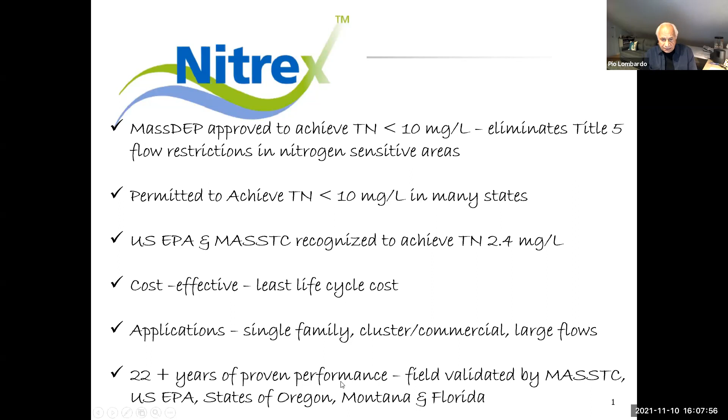As I mentioned, we have over 22 years of proven performance that has been field validated at MASSTC, US EPA, and the states of Oregon, Montana, and Florida, where a number of actual installations were implemented by those state agencies and independently evaluated. Brian Baumgartner of MASSTC made a presentation not that long ago at an EPA-sponsored event.

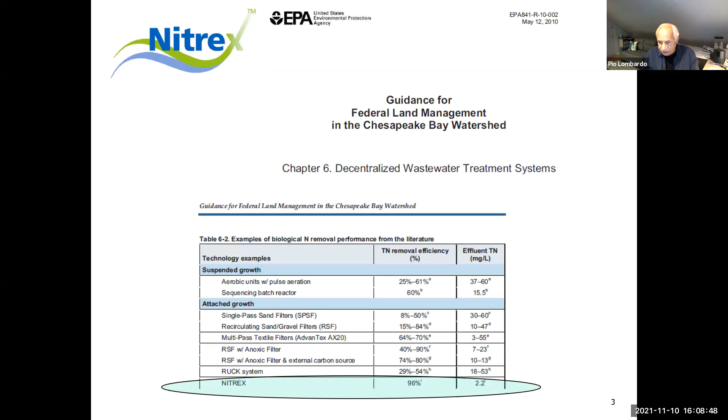So I just clipped what was summarized from his presentation that identified his list of the 5 best available IA technologies, and Nitrex is right there along with a few others in terms of effluent quality, as Brian indicated. EPA evaluated this back in 2010 and issued a report providing guidance for federal lands in the Chesapeake Bay watershed. As you can see, it provided documentation that effluent TN for the Nitrex system was 2.2.

It's a passive technology. There's no aeration required. The only requirement, and it's really site specific, is there's a need for some pumps - we're talking about 1/3 horsepower pumps.

The treatment system cannot be shut off by property owners. I know that's a concern with certain technologies. The technology can be completely gravity-fed when sites have sufficient slope. In fact, the original applications back in 2001 out in Oregon were indeed just pure gravity. They went from basically a single pass sand filter, then through the Nitrex filter, to discharge. There were no pumps needed there - one just needs the topo for that.

There's no sludge that's produced. The electricity is mainly used, or only used, for periodic pump use. The pump operates - I forget the exact numbers - but it's less than 25% of the time, and it's very low wattage.

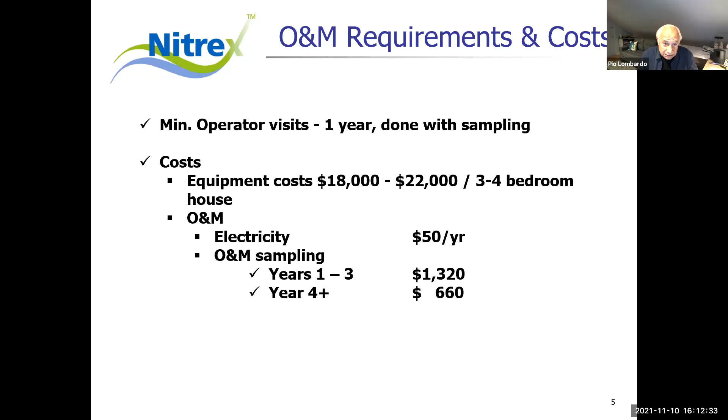Naturally, when the operator is there to collect the samples, they do the minor maintenance needed on the system. The major maintenance item has to do with the pumps, really just the floats, and the spray nozzles periodically need to be cleaned. That's it. Now, in terms of nitrogen removal, I'll say parenthetically, since I understand this is of interest in certain watersheds, phosphorus removal features can be added to the system if desired.

I've also been focusing on single family systems because that's my understanding of the focus in Wellfleet. However, the Nitrex has been used for larger scale systems throughout the Commonwealth and many other applications.

We use a SCADA system where the system is managed by a PLC, programmable logic controller, which has an internet connection that communicates to the engineer and operator for the system. Daily reports are electronically issued on system wastewater flows and process unit status. These are predominantly mechanical systems.

We know there's an effort underway for this device, the nitrogen monitoring device, and should that get proven to be usable, it would make a huge positive impact on operational costs.

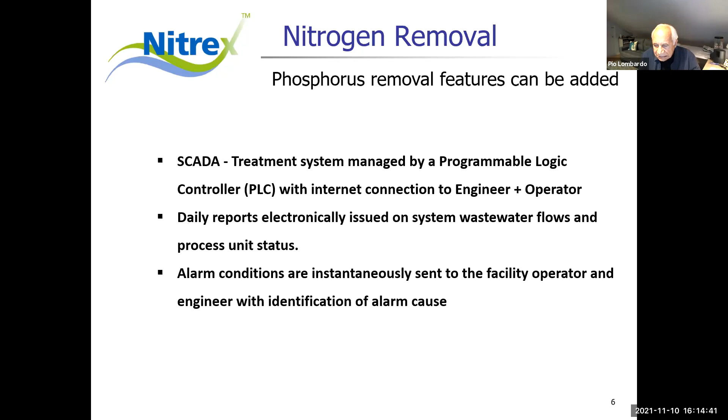This is an example of the PLC at a cluster system, at Granby, Massachusetts wastewater treatment plant. This is a groundwater discharge location. Code flow is 17,000 gallons per day. You'll see all the various pumps in the system are monitored in terms of their runtime and flows, so we can watch what's going on.

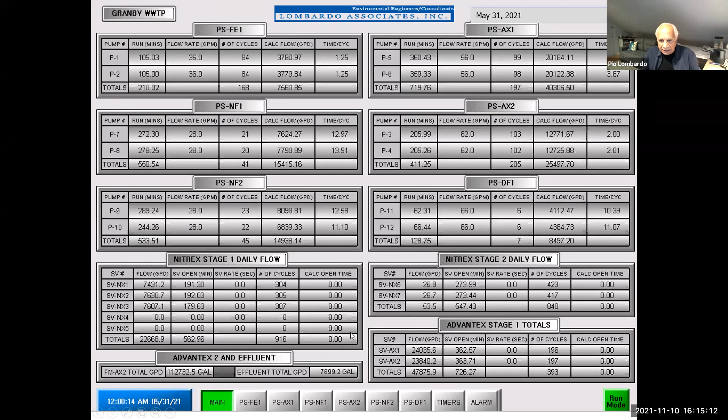At another facility, we also have real-time monitoring of nitrate and ammonia levels throughout the system.

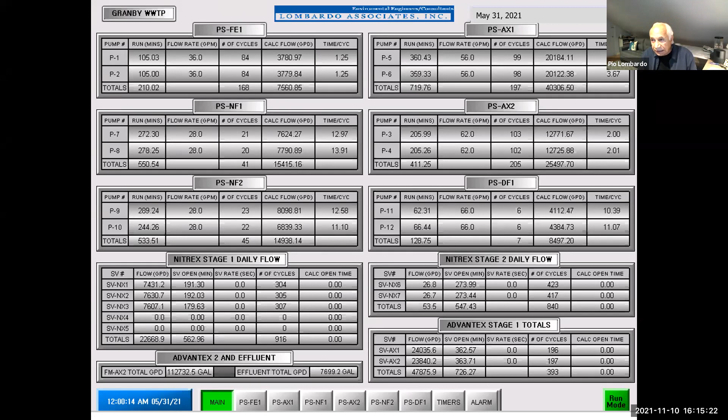We also had installations down in Rhode Island. We made a number of donations to the URI people and installed the system, as you can see, in the year 2003.

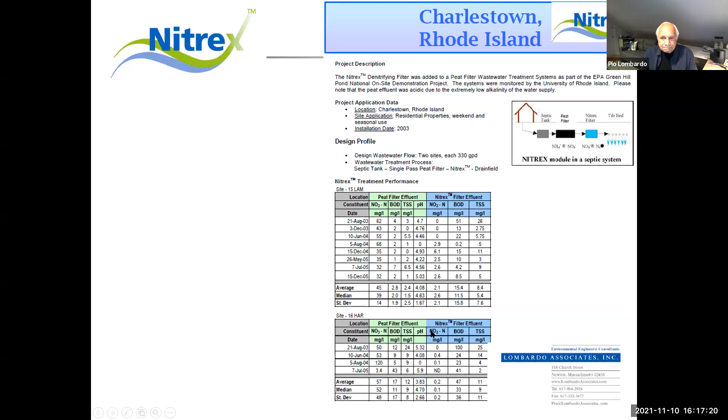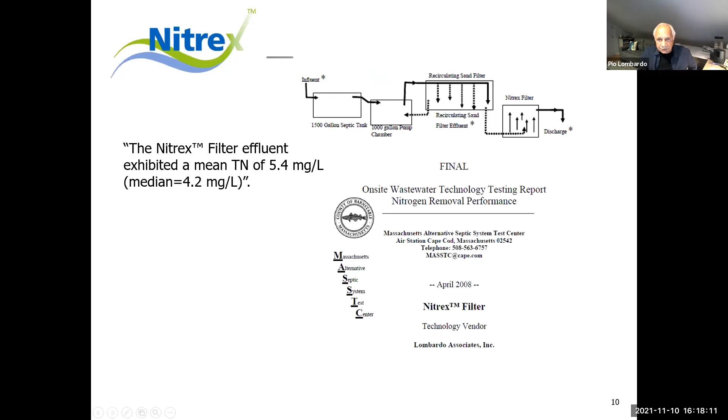In terms of larger scale systems, we've done a number of cluster developments in Massachusetts and other locations. In Mashpee, it's underneath the parking area, and that's one of the nice features of our system - in certain situations, we're not consuming land, so the land can be used for other purposes. We also have a similar situation in Eastham, where it's about an 8,000 gallons a day system.

And then in Malibu, California, it's underneath the shopping center parking lot. You can see the manhole covers there. That one was a design flow of 45,000 gallons a day.

And then recently, we've completed construction, and it's been operational now, of a system in Southampton, New York, where 11,000 gallons a day serves 37 houses. And this is the treatment plant. Again, everything's below grade, and that's just the operations building. The county there has strict requirements on the operations building, though not much is really needed.

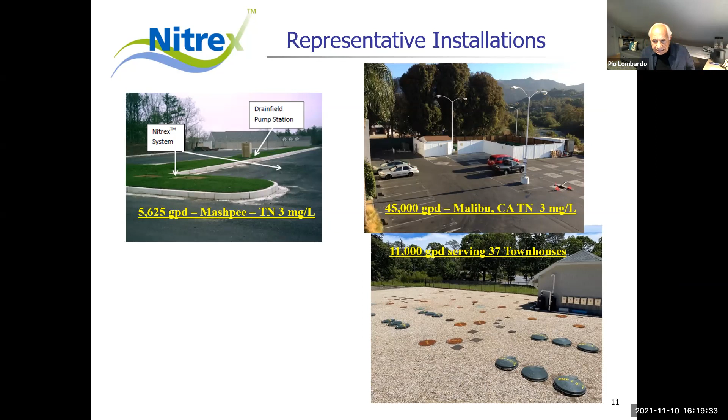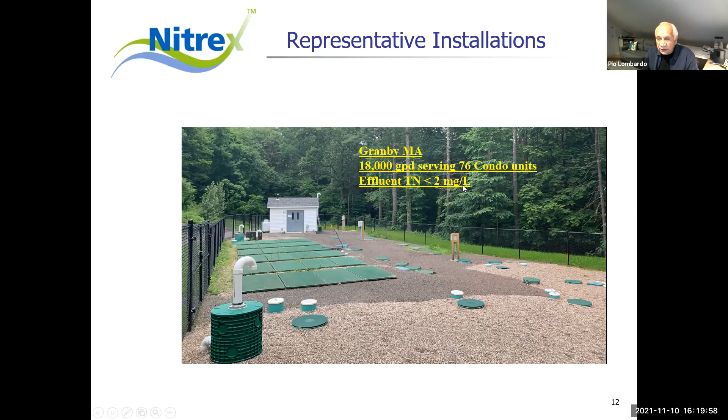And this is an illustration of our facility in Granby, which is, I guess, 18,000 gallons a day. It's serving a condominium. The effluent at that location has consistently been under 2 milligrams per liter, with sampling and lab analysis done every month.

So with that, I know we wanted to stay on a fast track. That concludes our presentation. Naturally, I'm happy to respond to any questions.

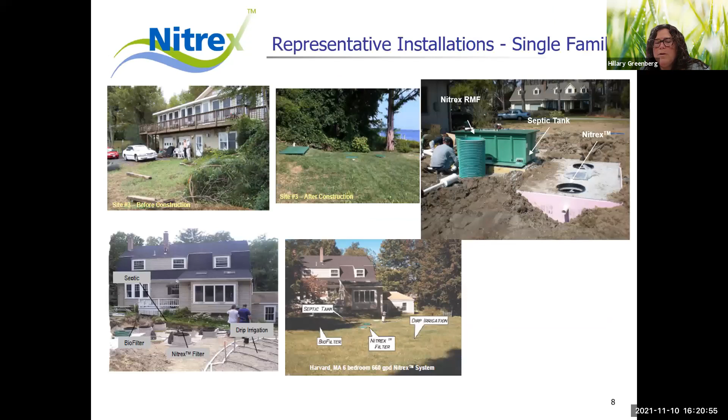Seasonality - can you tell us how your system functions? We have a lot of seasonal homes here in town. What does that do to the sampling protocol? What do the numbers look like on seasonal occupancy?

Yeah, good question. We frankly addressed that at MASSTC back in 2001, where we operated the system - this was all done under George's and MASSTC's control - but the system was basically shut off during the week and operated on weekends only for, I forget, a number of months. There's no change in treatment performance.

So the reason, and the beauty of the technique we use, is that it's a fixed film technology versus an activated sludge technology, and fixed film technology is much more resilient towards varying flows and strength. That's the reason why we have always relied upon fixed film technology. So again, it's not an issue, and we have documentation and data from MASSTC that shows that it's not an issue.

Great. You have a guarantee for your system that if the nitrogen is not coming in below 10 milligrams per liter, you will remedy the situation. What does that look like for a homeowner?

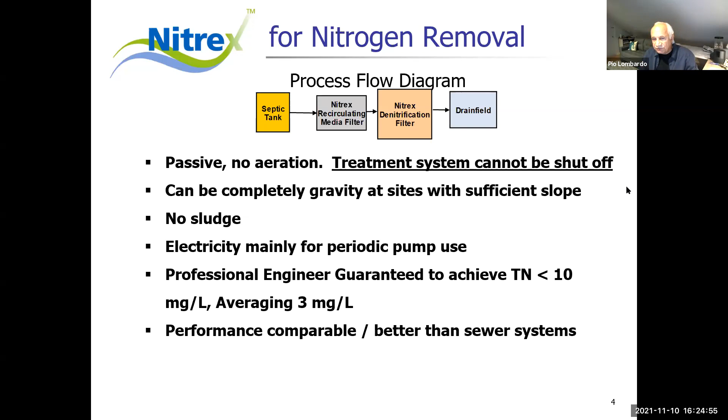Yeah, the way oxygen is provided to the system to achieve nitrification, that's obviously an excellent point, is frankly just by recirculation. The analogy I'd make is it's basically a recirculating trickling filter. The aeration just occurs, like a cooling tower, if you will. It comes from pumping the water on top and letting it spray down on the media. When you do that, air gets incorporated into the water, so that's how oxygen is injected. It's a passive technique versus bubbling air into the water. So the oxygen comes from that recirculating media.

Now, depending on the size, some units don't have it, but there is a fan that moves the air around. It's not bubbling air into it, it's a peanut fan.

But even if you're using an RSF type of media filter, the fact that you're pumping to recirculate does not make it an entirely passive system. Oh yeah, no, I agree, it's not entirely passive. It can be if you have the slope on a property, but you're correct, it's not entirely passive -- it has a small pump.

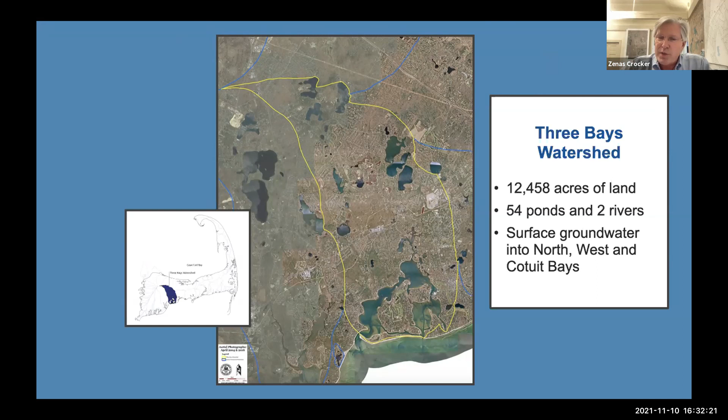Unfortunately, the gold prize goes to Popponesset. The silver goes to Oyster Pond over in Falmouth. This is the third worst. We don't want to win that award, but it's a great area to study the situation, try to understand what we can do, what steps we can take to clean up our water and fix our watersheds.

Here's the town of Barnstable expansion plan, which we applaud. Three phases, 30 years. Originally it was scheduled for 60 years. I stood up and said, that's a bad plan because almost everybody's dead by then. So let's have a plan where maybe some people are still living. It's a plan we need to move ahead with, but it's tremendously expensive.

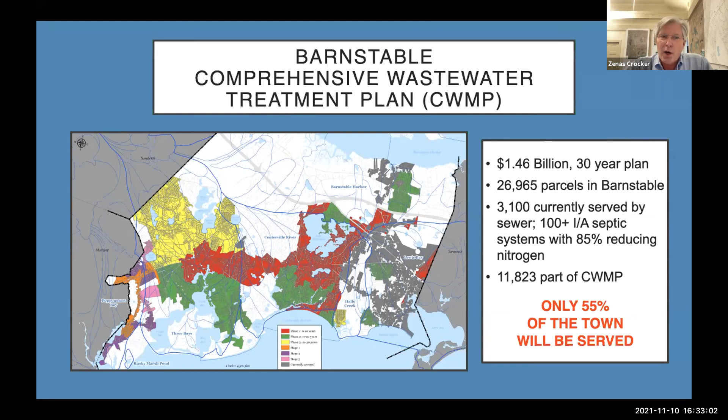One of the things you can see in this illustration is the white spaces do not get any treatment ever. We think that's a missed opportunity, especially when we need to focus not just on the estuaries but also on our lakes, ponds, and drinking water. That's critical. We have a lot of partners here.

They're all really important. A lot of them are on the line with us right now. We have a lot of work to do and we're trying to learn. But what are we doing?

So we identified Shubael Pond, a classic kettle hole pond in the town of Barnstable, as a perfect area to do work. You can see what we've done already with our partners at the US EPA and the US Geological Survey. We put in 34 wells, a number of multi-level sample wells. We have over 70 different locations where we can look at the water quality.

We decided early on we needed to test just a few systems. We'll pick the best in class, the lowest cost. We'll talk about the criteria we picked to try to understand what's going on and what happens when you replace Title V systems and cesspools. What happens to the groundwater? How are these systems going to work in a real world environment?

While a lot of the illustrations that Pio mentioned are critical — greenfield, new systems, big systems, commercial systems — our focus has been on how do we replace the 160,000+ existing systems on Cape Cod? How do we do that in a fashion that will make sense?

Some will argue we don't need to replace all the systems. I would argue that's not correct. We need to replace cesspools, which shouldn't exist at all. Title V systems don't work. We're actually putting in, by my numbers, probably 3,000 to 5,000 new Title V systems every year right now on Cape Cod.

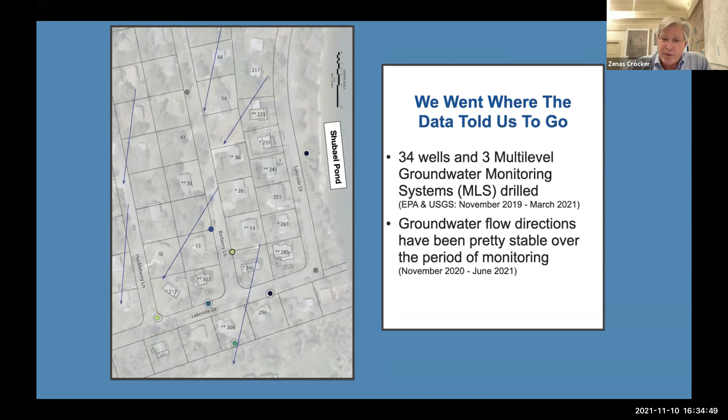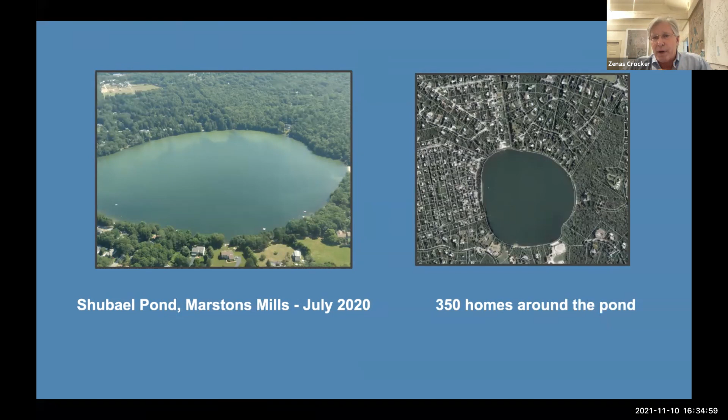Here's Shubael Pond. You can see an algal bloom, cyanobacteria, on the northern edge of this pond. In 2020, the pond's been closed for three years running because of contamination.

The NitROE system we're interested in because it's modular. You can drop it in. It's relatively easy. I'm not an expert, I'm not an engineer, I'm not a septic system installer, but I've become kind of knowledgeable about how these work because we decided to roll up our sleeves, pay for everything, and understand how they work.

When I mean pay for everything, we are doing the well monitoring that the US EPA is putting in wells, doing the monitoring work there. We're going to collect all the water usage, individual water usage, excluding any irrigation at every household. We're looking at influent, we're looking at effluent coming out of the system. We're putting lysimeters underneath some of the leaching fields. We're putting in new advanced technology that the EPA has been working to certify, and that technology allows us for real-time nitrogen monitoring.

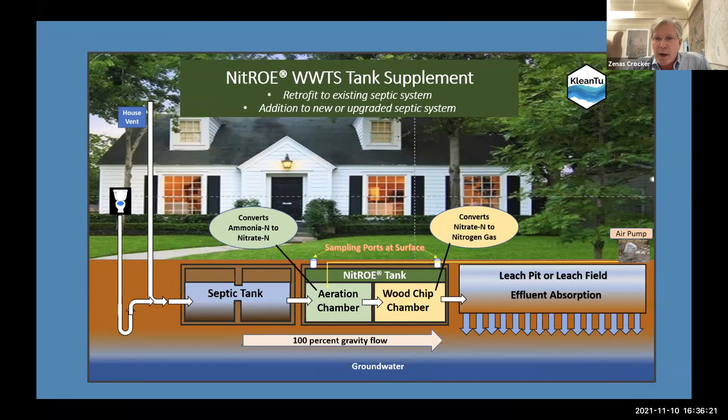All that's to match up with what we're going to do, which is monthly monitoring of these systems, even though this particular system is in fact provisionally approved. So we're still looking at monthly monitoring, even though we're technically only required to do quarterly monitoring.

Why do we like this particular system? I met with the guys who developed this system. They used to run waste treatment globally for Alcoa Aluminum. A couple of the guys retired to Martha's Vineyard, same problem. They said, you know what, we think we can design something that's going to work to help solve this problem. So they're using existing septic tank technology and retrofitting it.

Every Title V that's designed in has a reserve area, and in that reserve area we're able to put in, in this case, either a 1,500 gallon or 2,000 gallon tank. That tank is proving, we think, decentralized technology versus centralized technology is very, very critical. It's resilient, so we think there are a number of fail-safe elements here. The maintenance is very, very low. We'll talk about that some more.

It's monitored in real time. We think that's critical, so we can see - is the air pump on? It's the only working part. What's the pressure in the air pump itself, in the air lines themselves? What's the temperature in the tank? Cost competitive versus sewer - you can see the costs on the box to the right that we're experiencing so far.

So we've put so far 6 of these in one neighborhood. We'll have another 2 or 3 going in about a week. I welcome anybody who wants to come down, contact us, come see. You can look and see exactly how the installation's going.

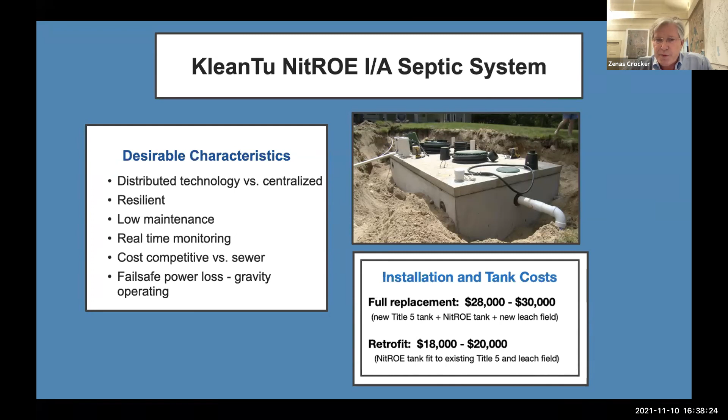Performance - here we can see the performance so far. The numbers that are interesting here is, it's highly variable, the influent numbers. So the brown is showing what's coming into the systems. These are the roughly 20 systems, 18 systems that have been installed at this point in time. There are more now, we're closing in on 30 at different sites, but you can see there's a tremendous variability. Some people think that could be based on diet, could be based on other considerations, water saving devices. In any case, very variable.

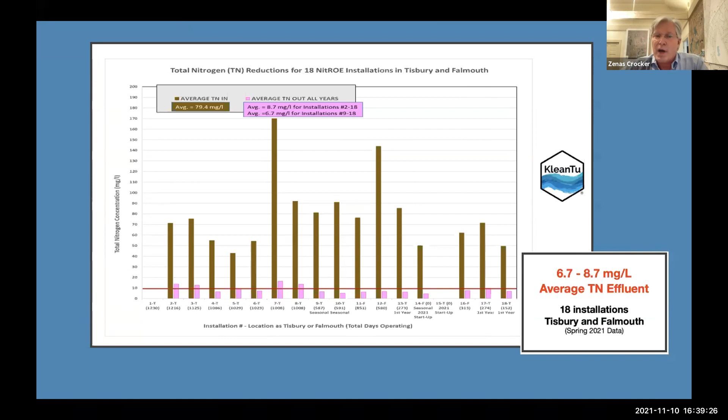So we developed a plan for each particular household. We've done all the engineering costs, and you can see what the various costs are here when you look at the screen. We're going to work hard to see if we can't drive the costs lower. One of the costs that we view as being higher than they should be are engineering costs, and we're not trying to get rid of engineers, by the way. But we think that we're probably going to be looking at maybe 60 to 80% of the systems that you'd approach on Cape Cod would probably be retrofits.

A retrofit means the existing septic tank is still operating and healthy, or the existing leaching field is still active and healthy, in which case we can insert a new system. In that case, we should be able to bring engineering costs down to a lower level. We have a working plan in place, so we really just need to know: do we have the elevation, do we have the existing conditions? It shouldn't cost $4,000 to do that kind of engineering work. If we can do that, we're bringing in costs at a very attractive level.

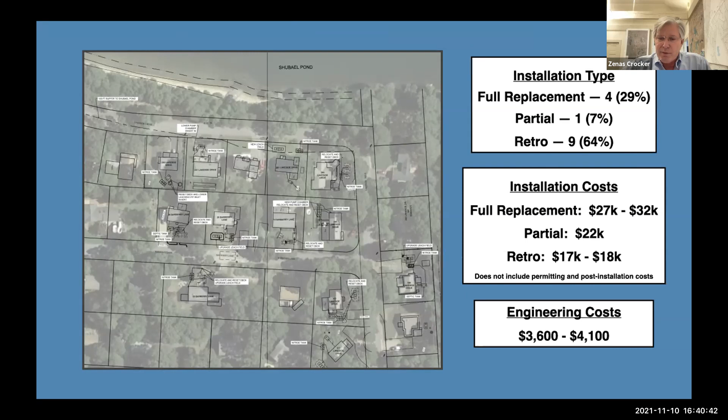We believe the air pump probably has to be replaced every 7 to 10 years, at a current cost of about $600. Limestone lasts probably for decades, maybe 30, 40, 50 or more years, and the wood chips also last decades. We're going to see how many decades these components actually last.

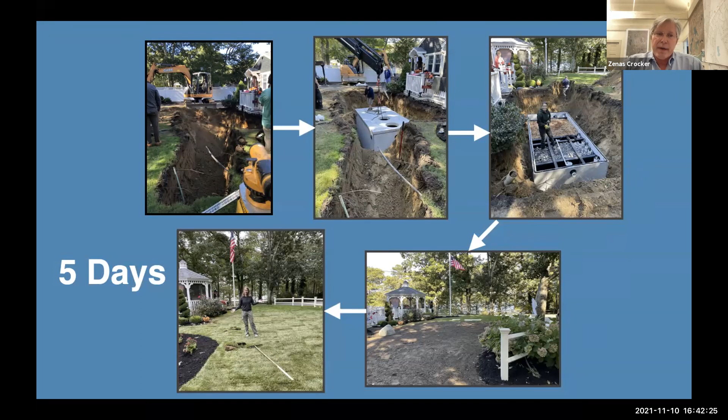The design here that we like, and is elegant in its simplicity, allows for old wood chips to be removed if need be and new wood chips put in. It also has an access panel, and these are underground as you can see from the pictures on the bottom left and right. Just like getting to your septic tank, periodically you might dig down a couple feet in your yard, pop the port open, and do what you need for maintenance. Otherwise the maintenance is really quite minimal.

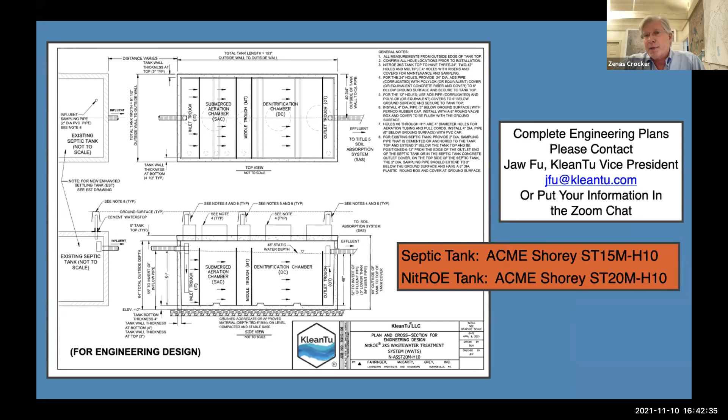Thank you so much, Z. I love this project and have been so interested in it all along. I'm glad you were able to come this afternoon and describe it to the folks of Wellfleet. I have a couple questions for you.

Exactly how many systems are you putting in around the pond? We're going to put in a total of 15 systems, 15 NitROE systems. After that, we'll probably put in a number of other systems, really a single kind of other system — we're working with an advanced layer cake design, with Brian Baumgaertel and George Heufelder.

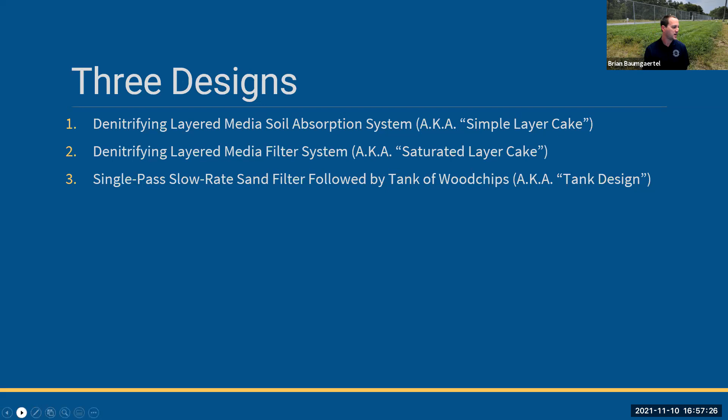So just to jump right into it, looking at the simple layer cake system, or the denitrifying layered media soil absorption system - this is the basic design. You have a septic tank, the effluent from that septic tank flows into a pump chamber, and that pump chamber is utilized to pressurize the shallow pressure distribution system that sits on top, which is that orange rectangle right here.

Wastewater from that distribution system trickles down through a nitrification layer, an 18-inch layer of Title V sand, and that's where you're doing all the nitrification - turning the ammonia into nitrate. This is typically the step where we're stopping with a standard Title V system. The sands we have are really good at nitrifying wastewater, turning that ammonia from our waste into nitrate, but they don't do a very good job of denitrification. So that nitrate is what gets into the groundwater and eventually makes it out to our embayments, causing all the problems we see with eelgrass beds dying off, shellfish problems, and algae blooms.

So the concept here is to intercept that plume of nitrate with a denitrification layer. What are we using for that layer? It's probably a theme you've noticed this evening - there are wood chips involved. It's an 18-inch layer of a 50-50 mix of wood chips and sand. The wood chips provide a carbon source for the bacteria to break down that nitrate into nitrogen gas. So that's the basic design.

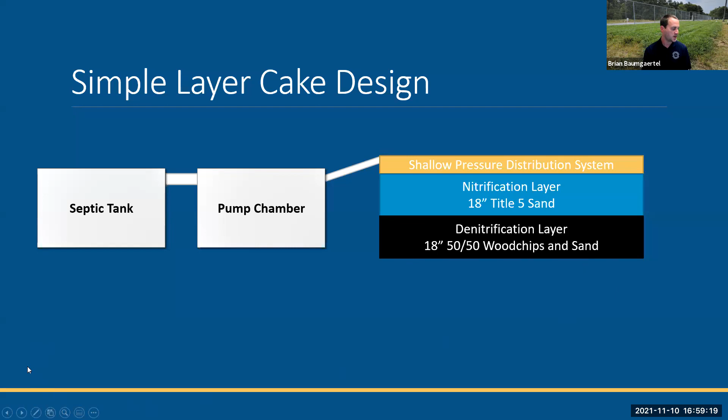Out of the bottom of this particular system, that denitrification layer, the treated wastewater would flow down into the ground just like it would with a standard system. So this is a single pass filter kind of design.

So we put one of these in at the test center. George was seeing some pretty good results with this system and wanted to do a full scale system, so we put one in conjunction with Stony Brook University. They're a group down on Long Island that runs the New York State Center for Clean Water Technology. They had a lot of interest in what we were doing up here and hatched a few ideas about what types of systems they could potentially research. So we have a joint project with them, and we put one of these in here at the test center.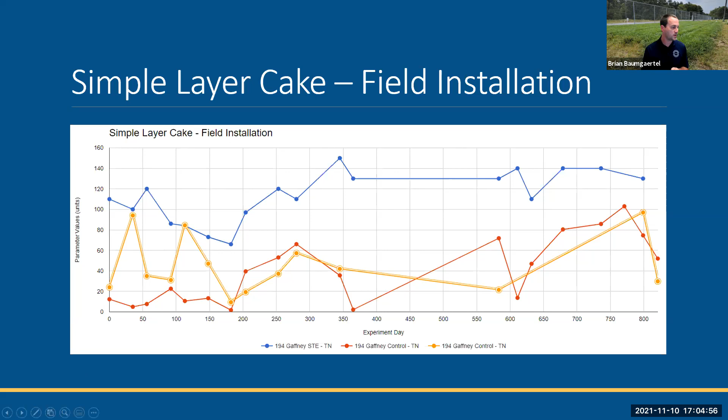The Stony Brook folks were here today doing basically an autopsy on this particular system to try to better understand what went wrong. So they're looking at percolation rates in the upper layers where things might have gotten clogged. They're going to be digging down to the wood chip layer tomorrow to analyze what the wood chips look like after 4 years of operation. So there's still things we can learn from this technology, but I think it's time to move on from it.

Let's try to identify some better technologies from the group of three we've been looking at. So the simple layer cake: the biggest advantages are simplest design, lowest cost. It has an integrated final dispersal mechanism because it flows out of the bottom of that wood chip layer ultimately into groundwater. It has the smallest footprint and very low power use.

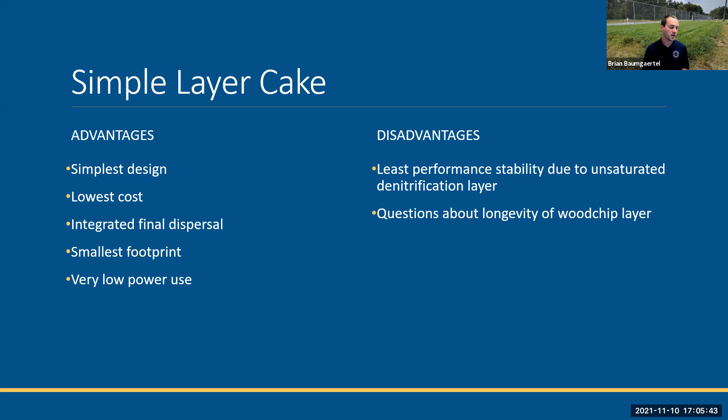The big disadvantages: least performance stability due to the unsaturated denitrification layer. We also have some questions about the longevity of the wood chip layer with this design, because there are concerns that more oxygen is getting down to the denitrification layer, which we suspect could cause composting of the wood chips. And if you're composting the wood chips, you're not using them for nitrogen removal.

So moving on to the next design paradigm, I'll call it the denitrifying layered media filter system. We like to call it the saturated layer cake, or big layer cake, here at the test center. The basic idea is very similar to the simple design: you have a septic tank, a pump chamber, a low pressure distribution system, and two layers. One is an 18-inch layer of Title V sand, the second is an 18-inch layer of the 50/50 wood chip and sand mix.

But the difference here is that we wrap the bottom layer in an impervious liner. Why do we do that? So that we can maintain saturation in that bottom section. Saturation is really key to maintaining the anaerobic, low oxygen conditions that the bacteria need to do the work of turning nitrate into nitrogen gas.

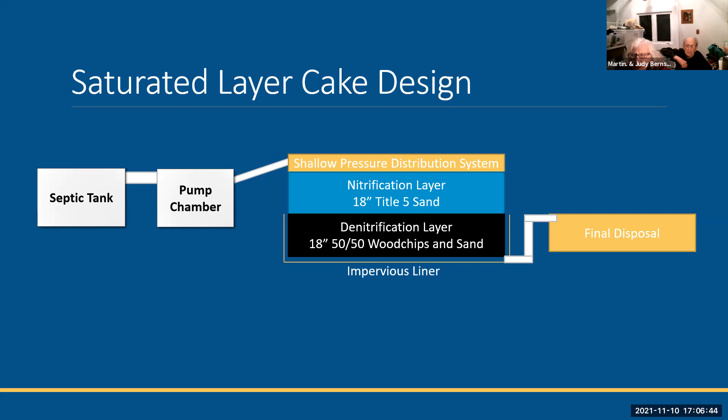What do you encircle it with? The 18-inch 50/50 wood chips and sand layer. How do you encircle it, with what kind of material? It's just an impervious PVC liner material, much like what's used over a landfill or other applications. It's a very commonly used material, a 30 to 40 mil material.

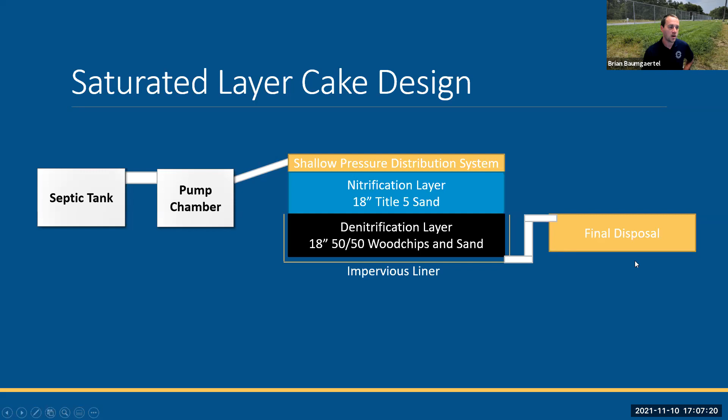We maintain the depth of liquid within this layer with the utilization of a standpipe. This is the only way the liquid can get out of this large bathtub-like structure. It then flows from there into a final dispersal field, an additional leach field off to the side for final disposal.

There are some blips that go higher, typically seasonal issues. When you get into cold weather, the bacteria that do all the work for us start to slow down, get kind of sluggish, much like the rest of us do when it's cold. So they don't do as much denitrification as they might in warm summer conditions. Overall, we see pretty good performance out of this system.

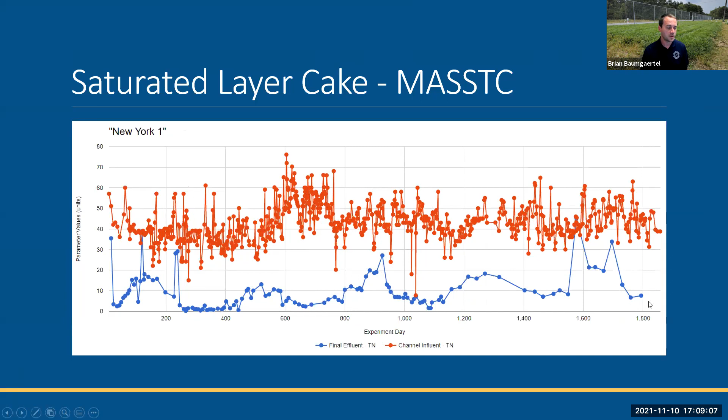The advantages of this technology: good performance stability, and it takes up a smaller footprint than the tank design I'm going to talk about. We have less concern about wood chip longevity because we're maintaining saturation in the wood chip layer, which can slow down the potential for composting. Also, very low power use because we have a single pump chamber. The pump runs probably 4 to 5 times a day for a minute or minute and a half, so you're looking at less than $50 a year for power use.

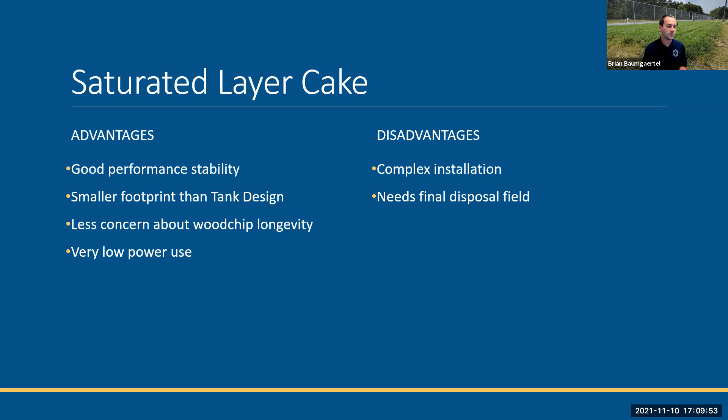The disadvantages: obviously a complex installation, utilizing a liner and putting in a second leach field, and it needs that final disposal field as well.

Now I'm going to talk about the final design, and you'll notice there are a lot of similarities between this design and Pio Lombardo's Nitrex system. The primary difference here is the use of a single pass slow rate sand filter as opposed to a recirculating sand filter.

So here again, the septic tank goes into a pump chamber. We have a shallow pressure distribution system, and then that same 18-inch nitrification layer. But instead of going into the wood chip layer, we intercept it at that point with an impervious liner - that 30 mil impervious liner that we wrap around this section, so we can contain and capture all the wastewater coming through. That flows into the wood chip tank, going to the bottom and then flowing up, and then on to final disposal.

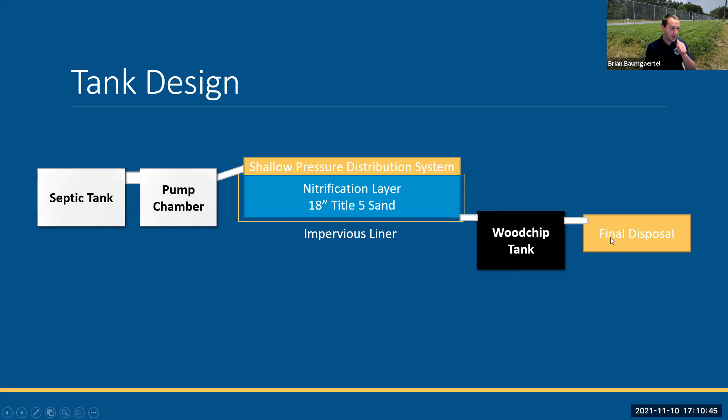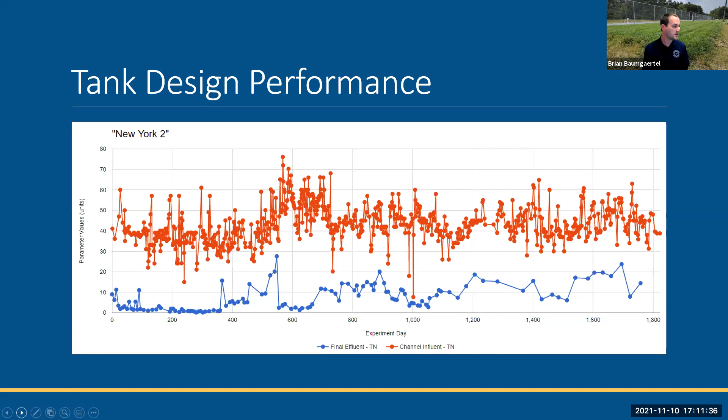I had the advantage of listening to the other presentations as they were going on, and Brian Dudley specifically had a question for Pio about the dissolved oxygen coming through his recirculating sand filter section. So I wanted to present a little data on our single pass sand filter. This is dissolved oxygen - basically a measure of the amount of oxygen in a liquid medium, measured here in percentage. 100% is total saturation of oxygen in that liquid media, and 0 is 0% saturation.

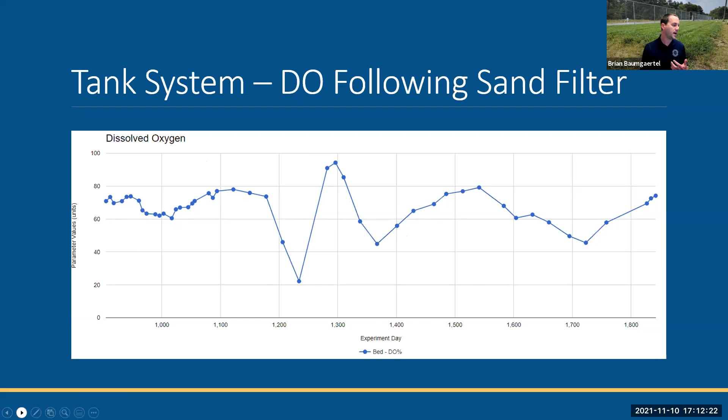So you can get full nitrification without utilizing any type of aeration component, merely using a sand filter with a pump. The advantages: best performance stability of the 3 designs. We have the least concern about wood chip longevity because you can easily pump the wood chips out of the tank and replace them. Whereas with the other designs, if the wood chips were running out, you would have to dig up the whole system and put in a new one.

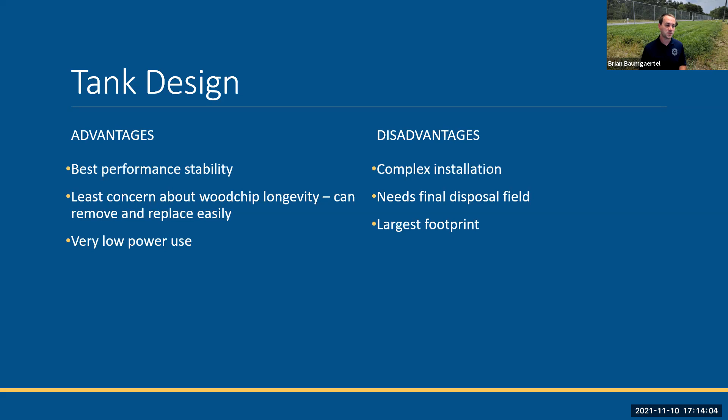Again, very low power use. The disadvantages: it's a more complex installation, and when I say complex, I'm comparing against the other two designs, not against the full world of innovative systems. It needs that final disposal field again, so you're going to have 2 leach fields, and as a consequence, it has the largest footprint involved.

So to sum all those up, I came up with a simple star system. 3 stars is sort of the best in that particular category, and 1 star is the worst. This is really a comparison against each other - I'm not comparing to Title V systems, I'm not comparing to Nitrex or any other technology out there. The 3-star system is strictly restricted to these 3 technologies because those are the only ones I'm talking about.

In terms of design simplicity, the simple layer cake wins in that category. Saturated layer cake is a bit more complex, but not as complex as the tank design. For installation simplicity, I would put the tank design as being a little bit easier to install than the saturated layer cake system, simply because you don't have that layering stuff - you don't have mixing wood chips with sand or any of the questions that might come with that, because those two are decoupled. Total system footprint: simple layer cake design, smallest footprint.

Obviously, the tank design takes up the most room. In terms of installation costs, just because of those things - the amount of tankage needed, the amount of space needed - the simple layer cake system wins there. Tank system design loses there.

Operation and maintenance, I put 3 stars on all these because it's really simple. It's a pump and a pump chamber and a pressure distribution leach field, which is like once per year operation and maintenance. Frankly, there's not a whole lot that really goes into maintaining that.

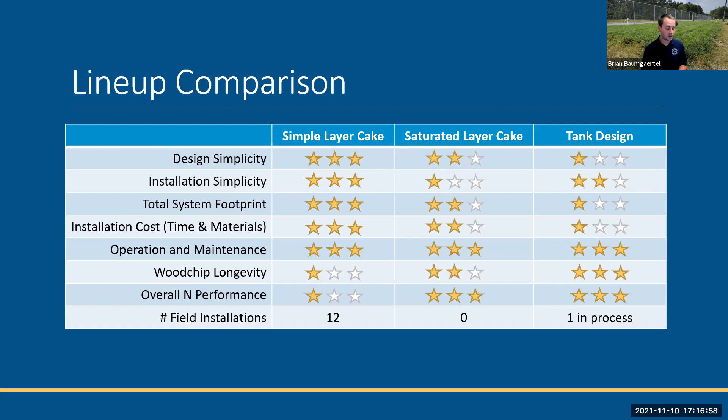And I put in the number of field installations of these that we have right now. So we've got 12 of these installed - well, I think it's actually 11 right now in the field. Of the saturated layer cake design, to the best of my knowledge, there aren't any of those unless somebody else has done them. And the tank design, we have 1 in process - that's the one that Z mentioned earlier in the Schubel Pond project. So with that, that is my presentation, and happy to take questions.

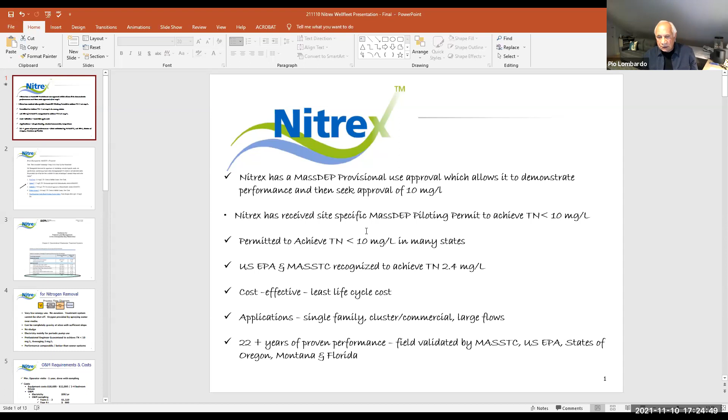It has it on a pilot, on a site-specific basis only. And then the second one was relative to, and Brian really did an excellent job clarifying this, that it is not a passive system. It's a very low use, low energy use system. And the oxygen is provided by spraying water over the media. That's how the oxygen transfer occurs. Brian spoke extremely well on that scientific issue.

And then the last piece was, I'd just like to thank you, Brian, for your gracious comments. It has been a long time, and I can be a pain.

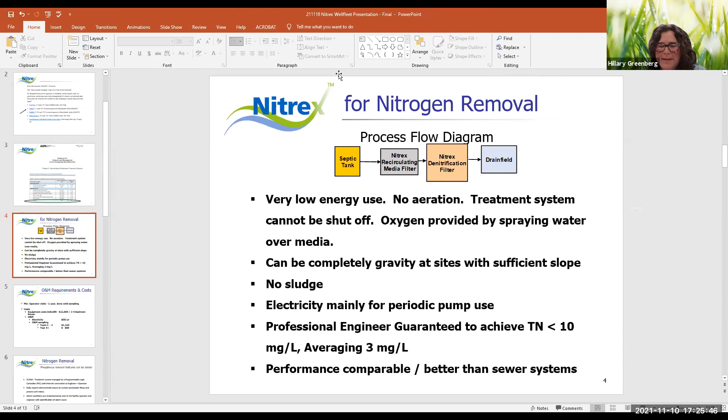Thank you, Pio. With that, we're going to jump back to Judy and Martin very quickly, please, because we have a very quick question. Of the different trees, of the different chips that you use, are there certain tree chips that are more amenable to your situation? Does it matter what the chips are, what trees are? Are they oak? Are they teak? I don't know.

No, there's no difference. If you can hear me, there is no difference. Doesn't matter. No difference. Okay. Doesn't matter. No. Thank you.

Great. Go ahead, Scott. All right, I'll be really brief. I just want to summarize. I think it's convinced me that all three of these systems work. They remove nitrogen. They're pretty passive or completely passive. So I think we've got some really nice options to consider now.

And the second point I wanted to make: I think there were several questions about seasonality, which is a really relevant question for Wellfleet as a unique, very summer community. And I think Brian Baumgaertel's data is pretty convincing that these systems do perform a little bit better during the summer, warmer months. I think that's a good thing for Wellfleet, because the nitrogen reduction numbers we have are on an average annual basis. And in fact, your systems in Wellfleet are operating for the most part during the time period which they will get the higher performance. So I think that's a good thing. I'll stop there.